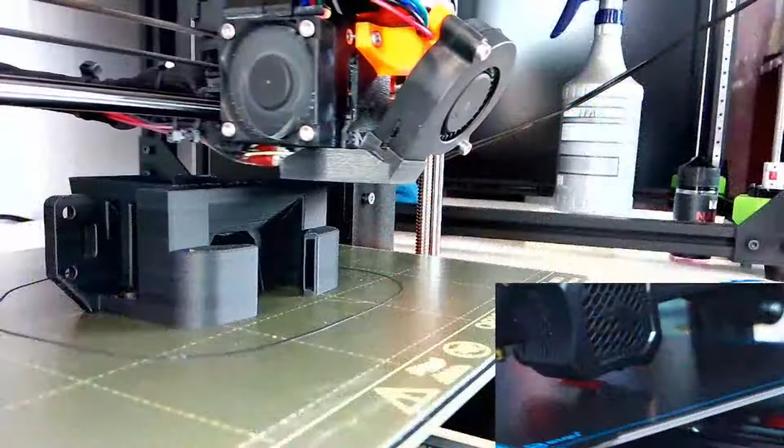I've been playing with the cameras a bit today. On Twitch you've been watching a couple things: this print, the new shroud for the Ender 3 V2, and more recently this one printing, the cable cover. I had recently finished the little fan cover right here. A couple strings on there, but hey, not bad at all.

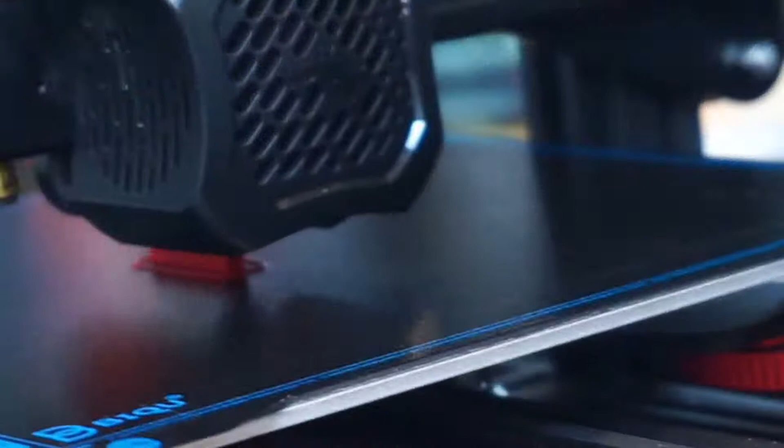Raise the levels just a bit. Okay, I can do that. Boom, let's raise this level there. And we'll go on to this one - that level is raised, and we'll go on to this one, and that level is raised. Let's see if that helps at all, or if I bring this a little bit closer. Oh, but then that's going to be in the way of that camera, so we'll just try something like this.

Okay, there we go. But yeah, so I'm reprinting this basically in ABS over on the Prusa - print this beautiful print coming off of that Ender 3 V2 after we did those modifications the last couple weeks.

So as I turn my head, that's going to affect the audio too. So maybe if I do leave this sort of right in front of me, hopefully not in the way of that printer, yeah, that might be better. Anyways, go ahead, leave your negative comments afterwards about how I screwed up the audio, I don't mind.

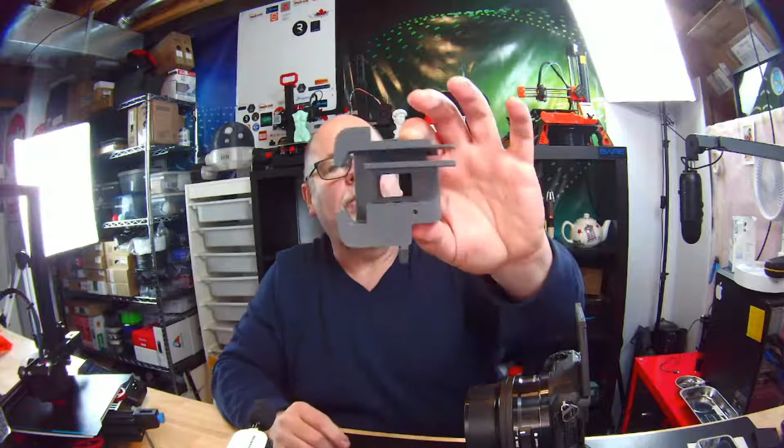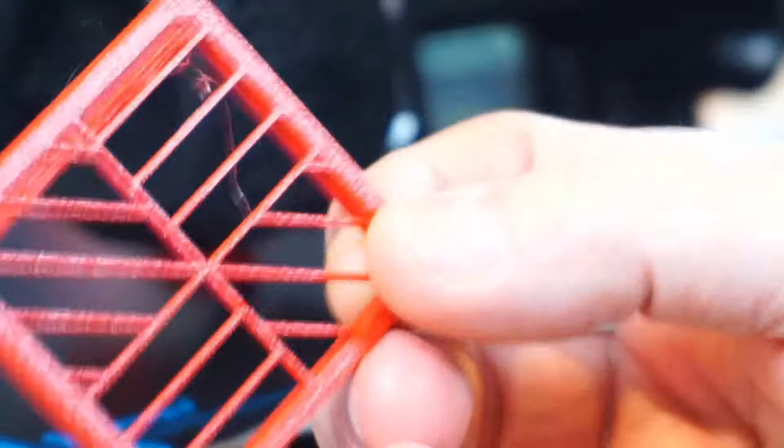Anyways, good print, it's coming out, it's just about finished over on the Prusa, that same thing, so there it is there. It looks like we've got about another, I'm going to guess based on what I'm looking at in my hand, probably about another half hour, if that, to go on this print. And in the meantime, I've also been printing this little cover, sort of just to get a red and gray, red and black color scheme to match the printer. So that's the little front for the fan.

Let me go ahead and pull out this little bit of a tweaker that's on there. I'm printing the little cable cover in the same matching color on this, so that cable cover is going to be done any moment now. That's not going to take long at all, looks like it's got about another 12 minutes left. Then we're going to tear apart the hot end on this and get it ready for that new whole assembly to go on. So that's kind of what we're working on.

Tweaker. I'm a tweaker, yeah. Is that what you're going to call me, a tweaker?

But I want to thank, is he on my stream now, for pointing me out to this model. I'm sorry, I don't remember who it was. K2 Design Lab, there we go, K2 Design Lab.

This is his design, actually, and he was on my Twitch earlier, and he's on Twitch right now. He gave me the link to this, and he said this is an insert for the fan for the front of this guy. Hang on a minute. There we go. I'm going to assume this just sits in, kind of like, it's probably better when there's a fan in here, but that'll sit on the front just like that, which will look pretty cool.

And then the cable holder, which is going to go in here, the cable cover is going to be that matching red. That's Jessie PLA Blood Red. So set that aside, we're going to wait for that print to print.

Having a quick peek over here, we are printing the last bit. I don't know why that's not focusing so well there. Oh, there we go, we're printing the last little bit. Why isn't that focusing? That'll focus on my hand. Oh, it's a slow focus. Let's see if it'll focus back on that. There, oh not quite, oh it's focusing right here. Okay, anyways, that piece is almost done.

Once that piece is done, we'll let this cool off a bit. Or we won't, we'll just play.

Hey Paul, how are you? You'll watch an adult only stream, but not a fans only stream. Sorry. Okay Jason, you're all my fans. What just happened?

I'm doing good, Paul. Thank you. These guys are trying to make me blush on stream, but it's not going to happen.

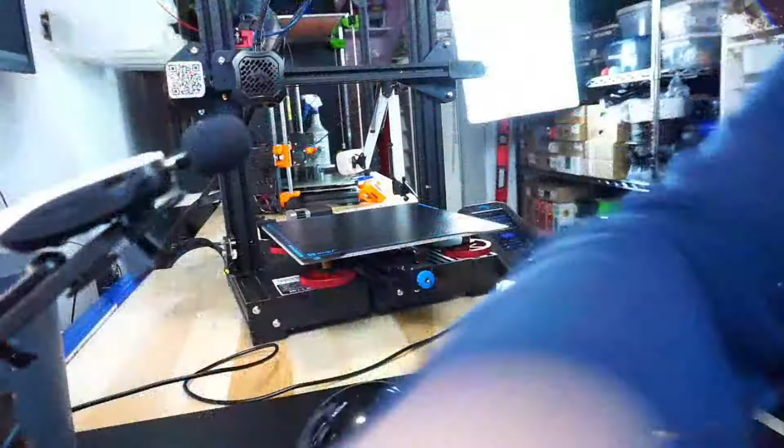Oh, that microphone's right in the way. Let's get that microphone maybe a little more over there. I don't know, that's still in the way. Dang, I wish I could wear that microphone, I meant to, but it just doesn't seem to want to work. Or maybe it's the kind of shirt I have on. Anyways, we'll figure something out here, don't worry about it. Look at that, how's that there? It's kind of out of the way.

I love live streaming. Okay, then we'll pull this guy sort of to the middle, bring that down a little bit. There we go. You here for me? Good. Okay, missing some chat here, I know. Okay, us Canadians have to stick together right there. There we go.

Okay, so Twitch 3D's mic doesn't work when he's wearing a shirt. Bear, stop it.

I wonder if I turn two mics on, does that give me stereo sound or does that just sound really weird? I don't even know if this microphone is working or not.

Anyways, I'm going to slowly start disassembling this head. Let's move that camera up a little bit here, see if we can zoom in. There we go. Looky that, and then you can see the Prusa printing in the background.

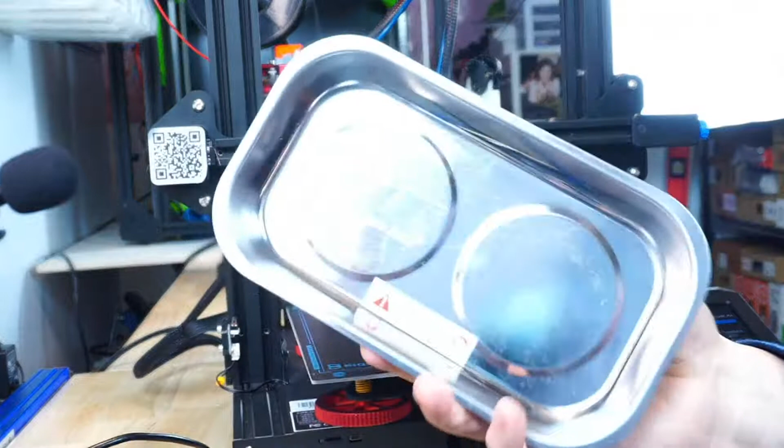And we're going to use our handy dandy... look at the size, look at the size of this. Oh hang on, this deserves another look. Look at the size of this tool, this little magnetic screw holder. I mean, that is massive. That is big, that is impressive, that is showing off. It's not how big it is, it's how you use it.

Okay, there we go, let's go back to the fun cam. Was this the same one? Yes it was. And the second one, I can never find the second screw in this. Is it this one? It's not that one. It is down below I think. I always have a hard time finding, or was it just the one? No, where's the second one? No, maybe it's just the one.

Hang on. What's this one do? No. I always have a hard time getting this cover off. There we go. Well, there is two of them, but I only had... oh, it's only being held on by one.

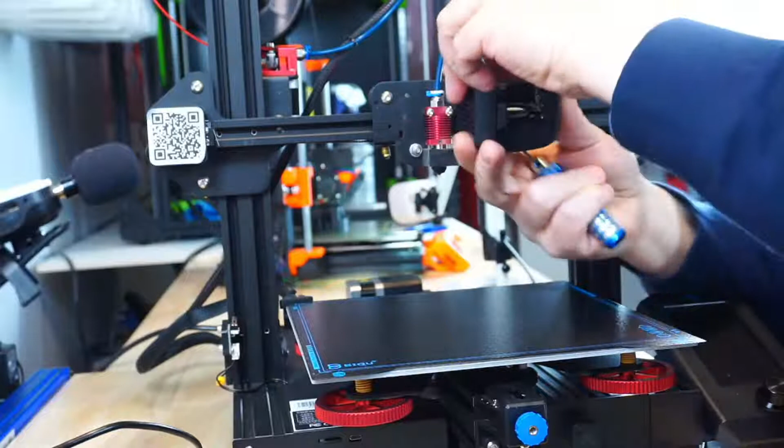Well, let's take the other fan out first. So what I'm going to do is take the inside fan out, and I think that'll clear the way for this part cooling fan to come out. So there's a screw at the top of the blower fan. It's a bracket.

Yeah, I got the screw at the top of the blower. Oh, this, oh right here, this little tiny thing. Ah okay. Oh, and sure, it's a Phillips screw. Yeah, go ahead, don't make it a hex key, make it a Phillips. So now I got to pull out my little tools.

Why is this not focusing? Come on. What are we focused on? We're focused on behind what's going on behind it. Focus here, focus here, come on. Don't worry about what's going on, nothing going on behind there. Stay focused right there. No. Bad camera. Focus, oh come on.

I got criticized in one of my videos for my camera work one time, said it should have all been set up and everything. There we go. Okay, they said it should have already been set up, you shouldn't have had to mess around with your camera like that. Well, oh well, sorry. Yeah, the movement behind is doing that. I could put that camera in manual focus, but not gonna.

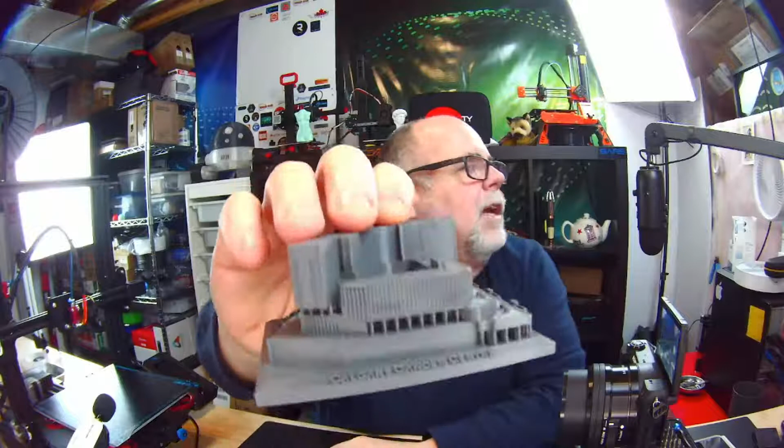In all honesty, people ask me now, I've had people come to me locally and say, what should I get for my first 3D printer? And they're on a budget. So I tell them an Ender 3 V2, because this thing is just performing beautifully for me. It's putting out, I don't know how many of you saw this, but after I did all the tweaks last week, I went ahead and printed a tiny little model of that big one I did. This on the Ender 3 V2, and it came out absolutely gorgeous with all the little details. That is incredible, that I got that much detail and that nice of a print off this Ender 3 V2.

So that proves this can do tiny little details. Now you'll see right in one corner there, towards my pinky around the corner, there's one of the supports I couldn't get out. It was just too small and I would actually wreck it trying. But everything from the bottom layer on this flexible build plate to the text, to the little windows and the pillars - boy, it turned out great. All my Ender 3 V2s are giving me that kind of quality with just those minor upgrades.

So, the software update - this is the Jyers firmware update. I used to call it Jersey, but it's the Jyers firmware update on this printer, and I'm doing that. I've done it on 2 of them, and I'm going to do it on a 3rd one. It is incredible, it's a great firmware update if you own an Ender 3 V2. I don't believe it's available for any of the other Enders yet, I don't know if he's going to do it, but it allows you so much on-screen control without having to hook it up to Pronterface or any of those things. It's incredible, it is really incredible.

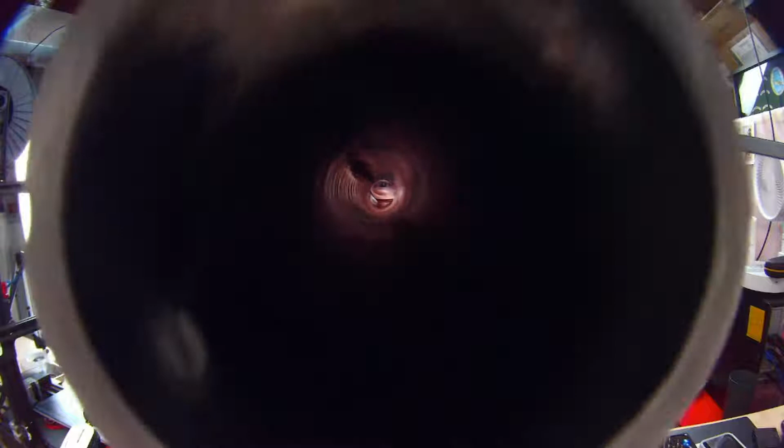Yeah, this is where dual fan compensates, you just need more actual CFM than the printer is generating. Makes sense, but this tubing may work better. I think you can get this in 4-inch too. Yeah, larger than your fan's diameter if you can, probably do a step down. You can get a 4-inch with an adapter to a 6-inch. I'm pretty sure PVC tubing, I believe it does come 2, 4, and 6-inch.

We are on the top layer. Let me adjust this camera a little bit.

Woohoo, come on, get in there. Get in there, get in there.

The print head's kind of hiding everything, but we're on the top layers now. This is going to be done in a minute. That's printing nice for ABS, my goodness. First time I've tried this brand of ABS, so quite cool.

Add as few bends as possible. Yeah, none if you can. There'd have to be one, I guess. Probably 2 bends at the most. That could be designed in a way. Anyways, we're going to figure that out. Get a step down print. Yeah, I could print any adapters I need, for sure.

Let's see what Liam's posting here. You're planning one of these. Let's have a look and see. Oh wow, that's huge. 8-inch inline duct fan, variable speed control, 135 US. That looks like quite the beast as well. The guy from the channel Unemployed Red and Hillbilly Creations has done a good video using this type of fan for his laser cutter.

Okay cool, I'll look into a few things. Yeah, again, first thing I'm going to do is make the enclosure for my laser. And the enclosure does not need to be too tall. I'm going to design and make my enclosure, and probably 3D print my corner joints for the enclosure, et cetera. That's a little project down the road.

Okay, we have a finished print. Oh, where'd it go? Oh, right there, we have a finished print. I'm going to let that cool just a bit because that was printing really hot - a hot bed, 110-degree bed and a 260-degree hot end. I won't touch the hot end to see if it's cooled off, but we'll let that bed cool off a bit. Let's pull it off the printer and let this thing cool off. Yeah, that bed is a little bit warm.

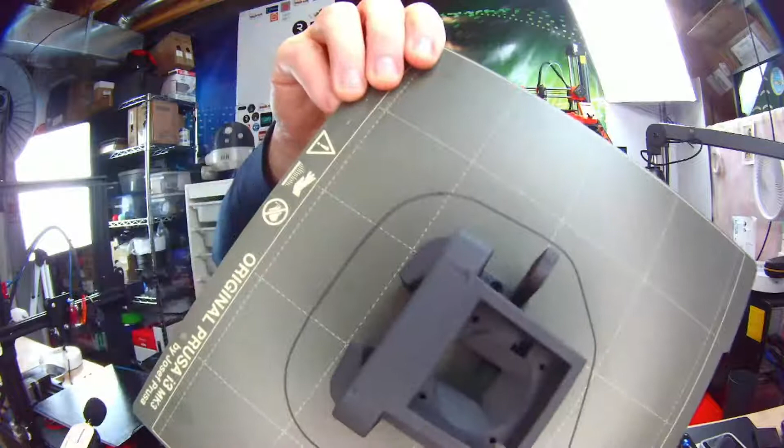That's a clean print. Oh, it's got like a nice black matte finish too. Yeah, that is Matter 3D's Performance ABS, first time printing with it. So yeah, that looks decent. I like the matte finish, it's pretty cool.

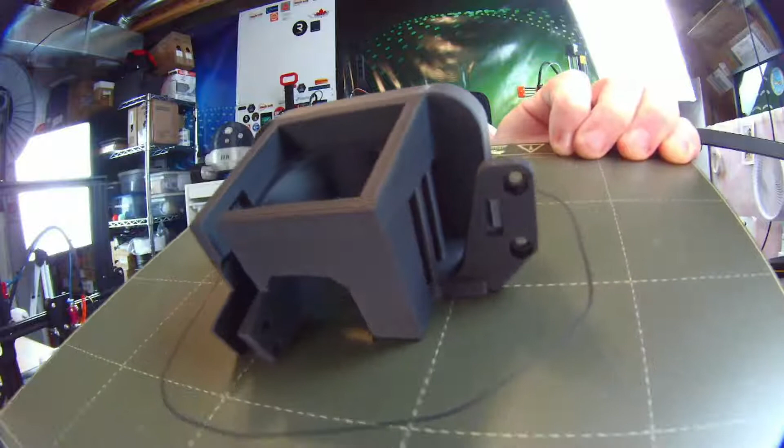Ooh, how close can I go? How close can I get? Yeah, let's let this cool off a hair. And there's a BL Touch mount. I don't have a BL Touch yet, but I can put it. I don't see ever needing a BL Touch on an Ender 3 V2 because I pretty much... I think I can get this off now.

There we go, okay, let's put that back. Yeah, I don't think I'll ever use the BL Touch mount. Oh, that's light, oh my goodness. And that's strong. Yeah, it's light and strong, that's good, turned out nice. There's the bottom.

Pretty strong. You have the same on your Ender 3 Pro. Same, this thing here? Cool. Amish Gnome 3D, welcome, thanks for popping in. Looks acceptable. Thanks, Jason.

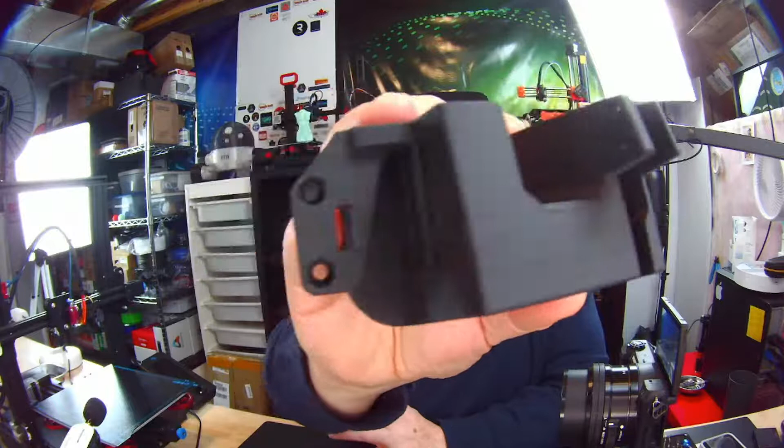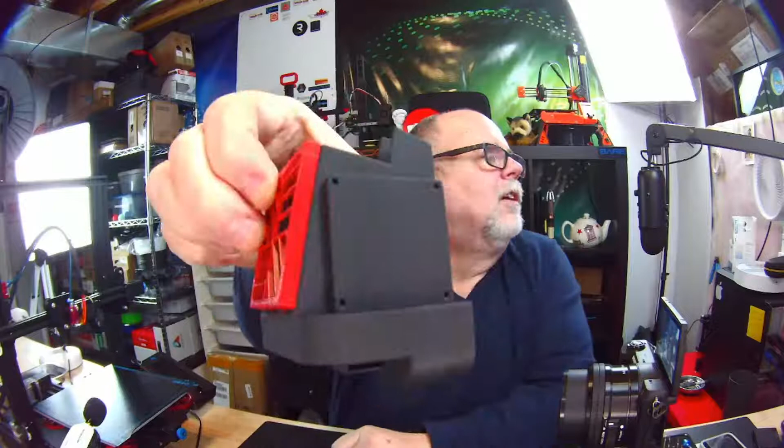Yeah, this is a nice matte finish, I really like that. Again, the camera doesn't do these things justice, but that is a nice finish. And that's going to look great with the Jessie PLA Blood Red. Oh, look at the way those colors are going to look together. And then the cable cover on the top is in that same red.

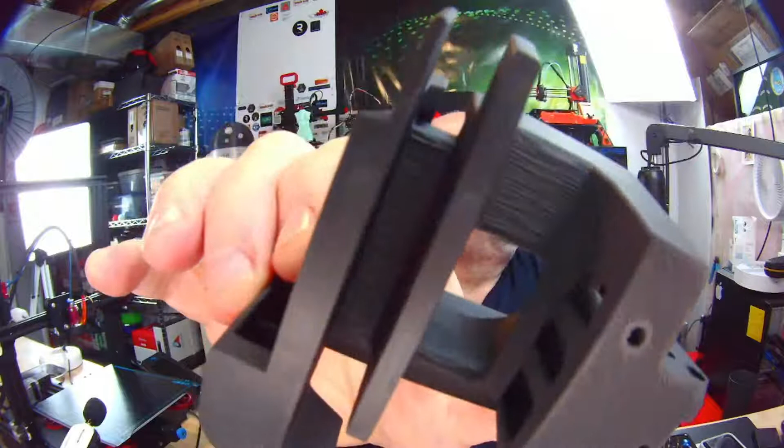That's cool. So, tried to break the fresh print. Okay, old curmudgeon, I'm just showing how strong this thing is. I've done it before and I've heard crack, and it happens. So the nozzle slows down and then gets rather shiny. No, that's great, I would recommend this filament for anybody, and even the bridging in there turned out really good, considering there was no cooling fan at all on this whole print. There we go, you can see the bridging underneath - turned out really good, so it is a beautiful print.

Okay, speaking of a beautiful print, woohoo! Let's switch to this camera now.

Problem with this camera is not many people know about it. This is a Sony A5100. Right now I'm on a 15th of a second, and right there I'm on a 13th of a second. I don't know if it affects the frame rate at all, but in order to get enough light to see this, unless I shine a light right on it, my aperture is wide open too.

Heat is the difference between shiny and matte, so to lower the temperature, slowing down and maintaining the matte finish is feasible. This was run at 260. The recommendation for this filament was 240 to 280 or so, it had quite the wide range of recommended temperatures.

So we're going to fit this fan into here, and then the little part cooling fan onto the side. Let's untangle these wires here a little bit first. There we go, that makes more sense. So this guy is going to sit in here, and then this little part cooling fan is going to come on and pop onto the side just like that. Cool, okay, let's first screw this in.

I'm going to have to use some M3 screws. The other one was just self-tapped, this old cover here had the self-tapped holes in it. Anyways, you had to screw in from the back. Whereas this one here, I'm going to have to put some M3s in from the front and then just put some nuts on the back. Let's see how well this is going to fit on here, and so far that looks pretty decent.

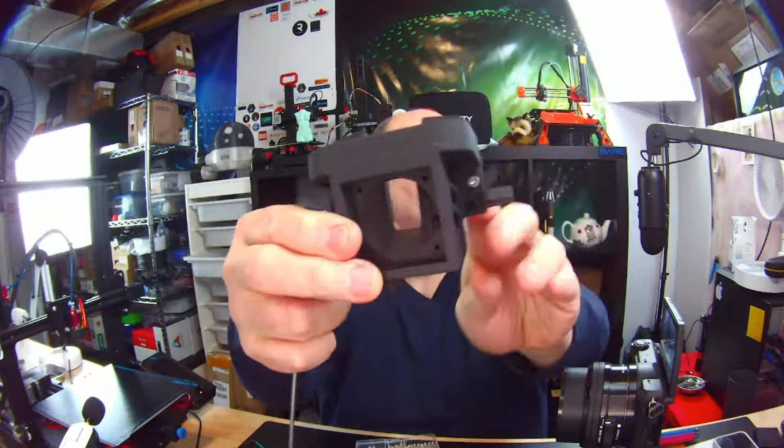So this piece, what they've done is the bolt or screw or whatever has got to go right down through. You can see where it is in there. So they've given you a little access hole up through here to put your tool in to tighten that in. There we go.

That looks about right. Here, I'm gonna pull this guy around here so you guys can kind of see what's going on here as well. Let's see if this works better. Oh, there we go.

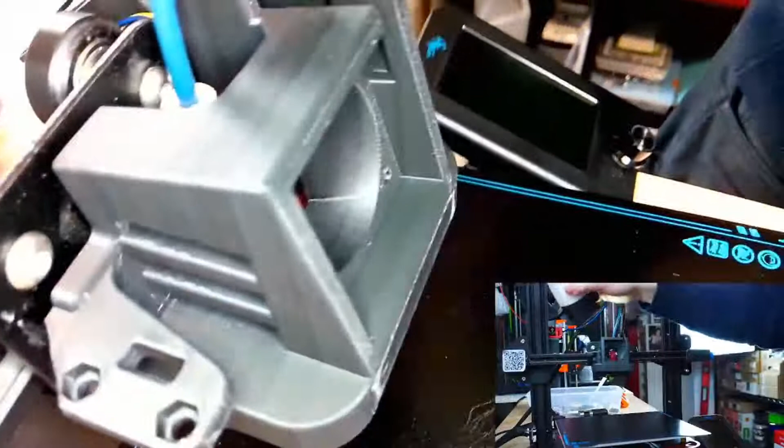So this one screw down below here is threading in fine. That second hole, however, if I tighten that on, it seems to be in the right position. Maybe that's all I need, because there's a second hole in the back here where I fed that other screw in through the front here. That's not lining up with any hole on here.

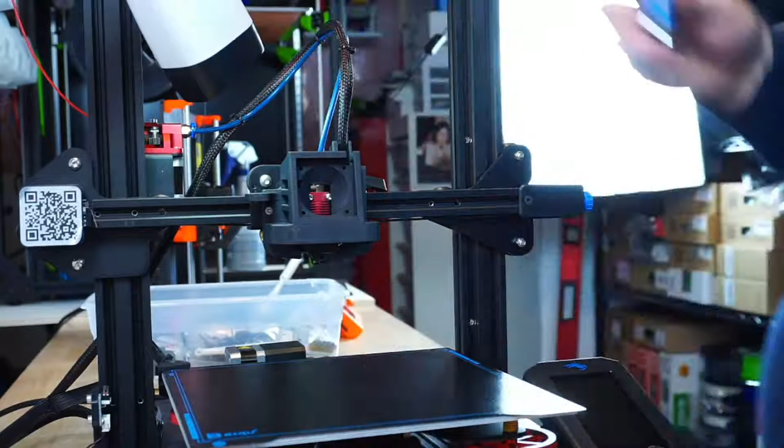So either it's an older setup, no, see that's no good, because that cannot move like that. So there's something, I need a second one to line this up, but this is not lining up at all.

Never tighten the first till they're all started. I know, but it doesn't, it's way out of lined up.

You may have printed the one for the Ender 3. Well, I printed... let's see. Don't tell me I printed the wrong friggin' one. The one I printed was downloads.

Was the Satsana BL Touch, which has on a V2. So for the Ender 3 V2 was the one I printed.

Let me go in here. Bear with me. I am going to put this camera on here so you guys can at least see me looking at my screen.

So let me go delete this model here. I don't need that. Let me look. I hope I didn't grab the wrong one. I downloaded both, I believe, but I know there was a difference between the two, because one says 2 and one says V2. And so I assumed the V2 was the Ender 3 V2.

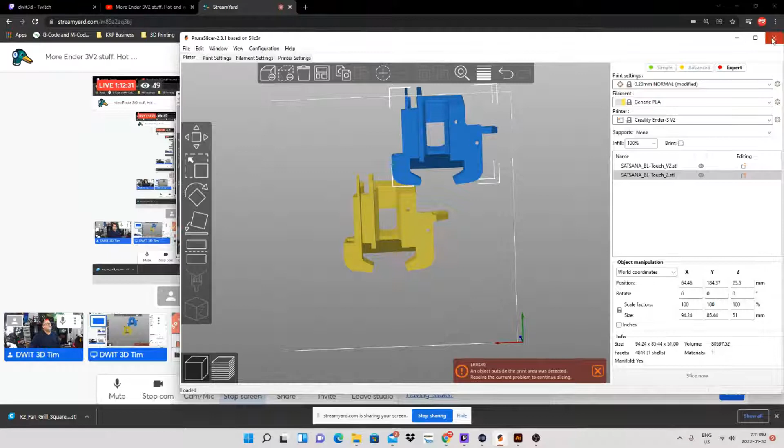So these two would not be, yeah. Well, let me make sure, in fact, that I did.

Let's go to Thingiverse, and let's quickly pop over to Satsana. What's it called? The Satsana. Hang on a minute, sir. I just forget the name of it. It's called the Satsana. Okay, let's open this back up again. Satsana. Whoops. Satsana.

Ender 3v2. So it is remix for Ender 3v2 right here. Was that the one? No, that's a different one. Ender 3v2 4010. This is the one here I downloaded, I'm sure.

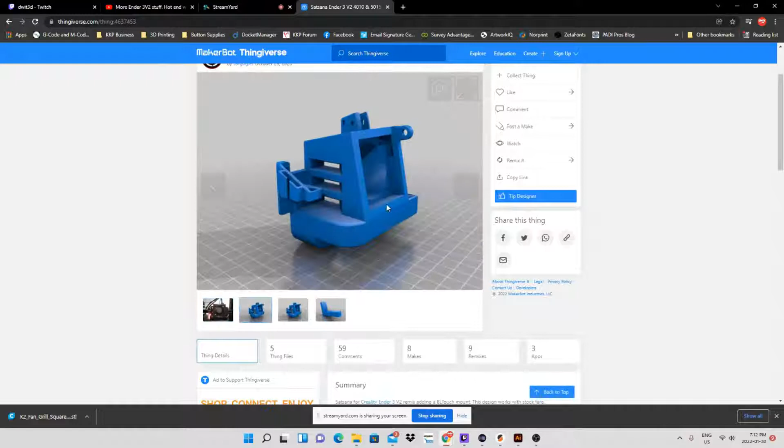Okay, I'm sure everybody can see my screen. And let's do this here. Yeah, that's the one right there I got. So the holes, or is it? See, that looks different. Why?

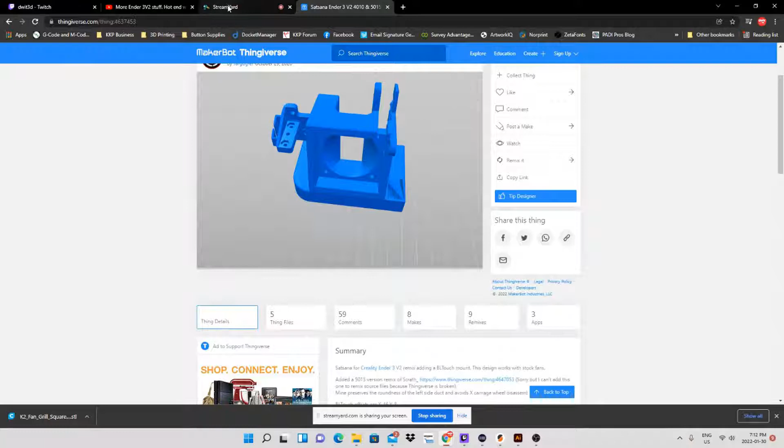That looks different. Did I download the wrong one? Come on, did I download the wrong thing? Yay. Yeah, I might have downloaded the wrong thing. Let's see, that's a different one. No, that's different than what I've got. Mine definitely doesn't have that little notch right here.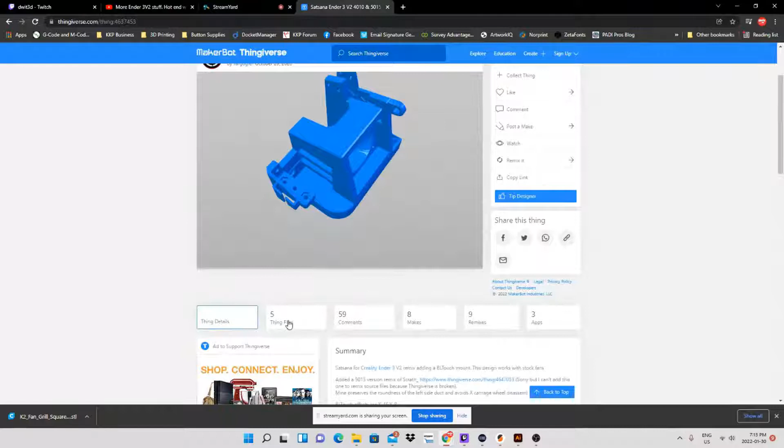Whoa, okay. I wonder if, in my haste, I did this one. Oh, you know, I bet I did. Son of a gun. Did I make a mistake? Did I download? Oh, you know what? I think I downloaded the wrong one. I think I downloaded the Ender 3.

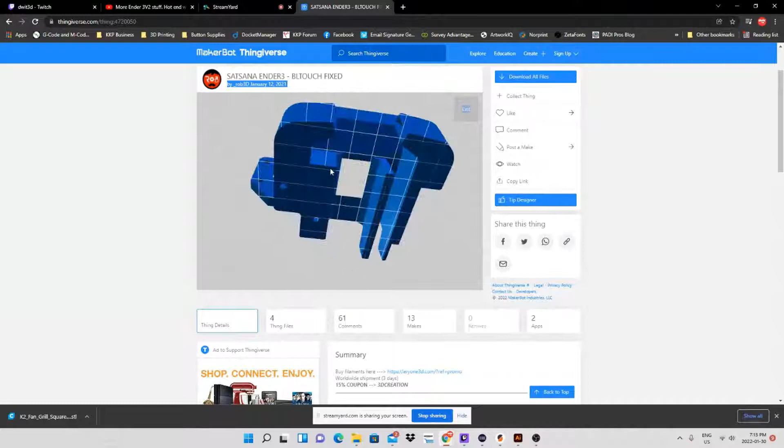This looks like the one that I just printed. Oh, no. Oh, well, you know what? So if you look at this one and the way it's laid out versus the, okay, keep an eye on this one. See how that's kind of laid out. You know, how it is.

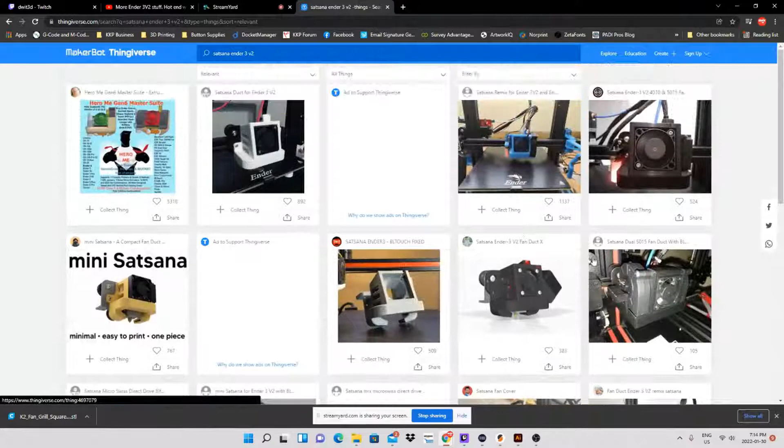Yeah, and then versus, oh, man, Ender 3v2 4010. That's the one I want right there. That's going to use the original cooling fan on it. So right here, if you look at that first one versus this one, and the way that mounts with the hole up there and down here, I think, as embarrassing as this is, I think I downloaded the wrong model.

Oy. You know, that's why I love live streaming, because there we go. Let me get this out of here.

Yeah, I think anybody have an Ender 3 want one of these? Oh, man, that's why you love my streams, Dan. Make it work. Drill some holes.

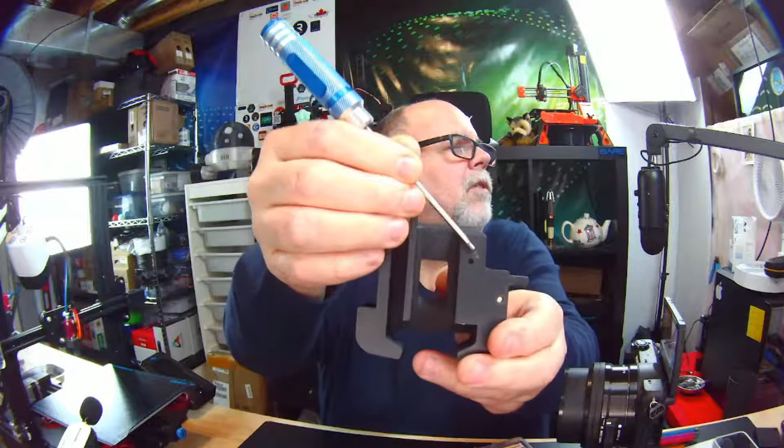So you can see right here the hole, and then right above the hole, right there is where I marked it to go. Problem with drilling through that is that's going to want to drill right into there, right through this whole thing where I tighten the fan on. Although I could get away with tightening the fan with three bolts, I suppose.

Different mark, oh there's marks, there's a couple marks. Marks are good, any mark that's on my stream is great. Mark Flanagan, I've known for 150 years. Mark Gilbert, I've known you since today, or whenever you started watching my streams. Hello, both Marks, though, you're both just as wonderful to me for being on my stream.

Thank you. 3 screws holding the fan is fine. Yes, but can I drill through this without... well, let's, only one way to find out, isn't there? Grab a drill with magnets on it.

Grab a drill bit. You guys want to see my really cool drill bit holder? Look at that, I 3D printed this myself.

Where's my smallest drill bit? Yeah, this is my smallest drill bit. Okay, well let's see. You know what, either way, if I have to print the part over again, I have to print the part over again. But it's a 5-hour print, and I'm not going to stream for 5 hours.

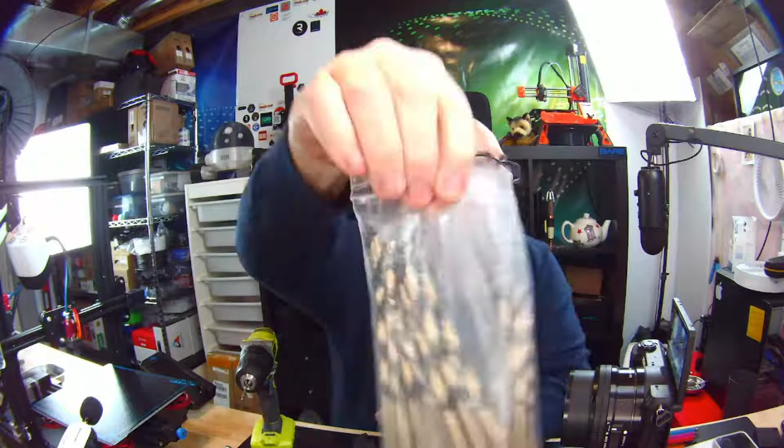Those of you that know me, where's Kieran tonight? Or tomorrow? It's tomorrow for Kieran. Kieran, where are you? Those of you that know me, drill, sharp bit, hands, parts, blood, maybe. Let's just see if I can get this to go straight. Oh, it's drilled through my little thing here a bit. Well, let's see, I made a hole.

Okay, now I'm going to have to make that bigger, because for a 3mm screw, for an M3, I need a 3.5 mil hole. What do we have here? We have a 3.5 drill. I started it with a 3, we'll go up to 3.5. Be careful, I am Tron. You know, Kieran's not here.

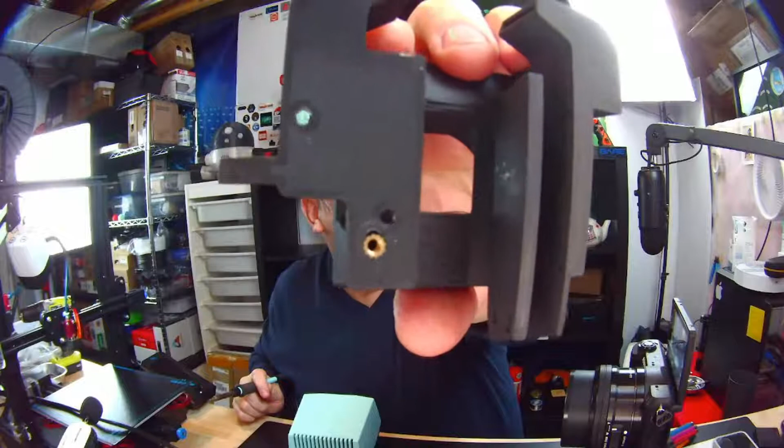Probably around printing temperature. Okay, let's just see. Let's give this a go. We're melting, we're melting, we're stopping. Oh look, it worked, I got an insert in. Did it stay in? I don't know, but it's in. I can turn this off and unplug it.

Oh, you know who I saw do that? It just hit me, it was at one of the local meetings here. Let me put the soldering iron away. It was at a local meeting. The person had made, I have it over on the floor there, I don't know if you guys have seen it, it's like a drill press for your Dremel. It's a tiny drill press, you put your Dremel in it and you can do a drill press with it. Well, this guy made one with these type of insert plugs because he did a lot of insert things, and he puts the insert on there. He puts his part down and it just drill presses his insert into it. Really, really cool.

Hot glue or super glue? We don't need no stinking super glue. Don't tighten it too much. Okay, well, let me see for one, I want to make sure. Oh, it's in there, it's in there good.

Okay, well, so I don't need a long bolt, I can probably get away with a short one. Let's see what I got for M3s here. I got everything under the... this is my spare parts bin for the rat rig build, by the way. Most of the stuff in here, there's an M3 10mm I can use right there. Most of the stuff in this box is left over from the rat rig build. So that's cool.

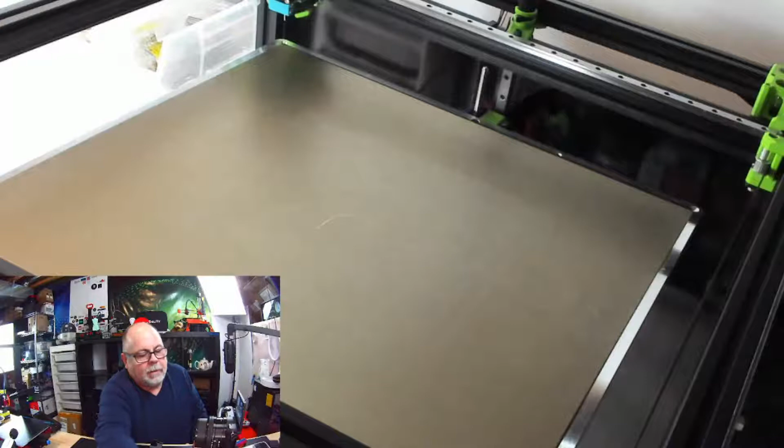Okay, let's try this again. Let's grab the screw out. Acetone welded in, acetone welded in. I don't have any acetone.

What do you think, I just have a bottle of acetone sitting around on my shelf here, Jason?

A dab of CA, I think this will work. I'm just going to try it. Ah heck, let's just do it.

That's what you think, DWIT. So people ask me, what's it mean? It means do what it takes. Okay, DWIT, or it just means do it. Do it, just do it. Anyways, whatever, I'm going to shut up now.

Okay, let's put this in. Okay, let's get this one started. Let's see how we're going to do here. Let's go to the camera here so you guys can see me messing around here.

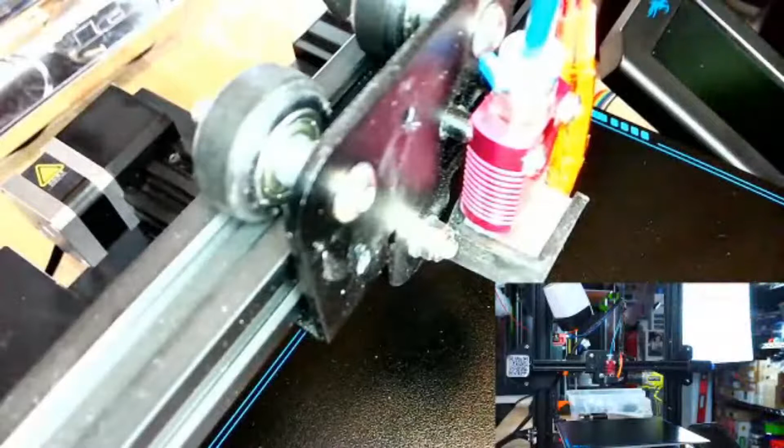Or let's go to the close-up here, let's use this close-up camera. Again, this close-up camera, the trend for this close-up camera was started by Mr. Chris Nerys himself, because I saw him using this close-up camera and I loved it, so I ordered one right away. Now a lot of streamers are using this exact camera.

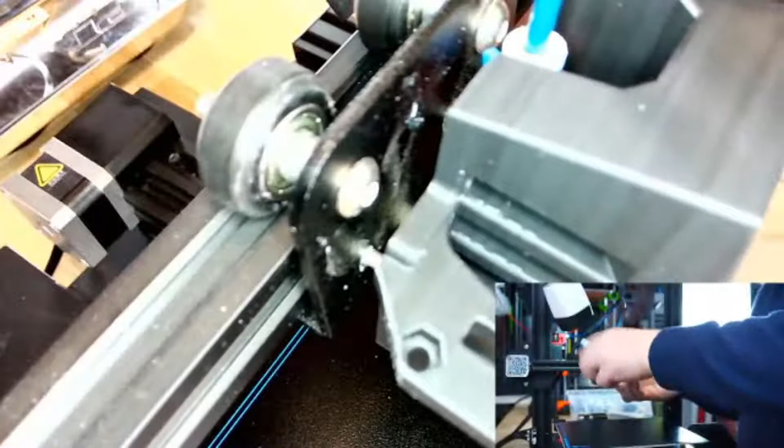Okay, let's get this one started. Okay, so far so good. So I can tighten that, not quite tight, just enough so I can wiggle it a bit. And then if my drilling, drawing, etc. was accurate, I should be able to.

I'm going to not make you guys dizzy, we're going to move this guy around. Hopefully show you in here. Let's see, there we go. So where I'm looking is this hole right here. Doesn't look like it lined up. Oh, maybe. Oh come on. No.

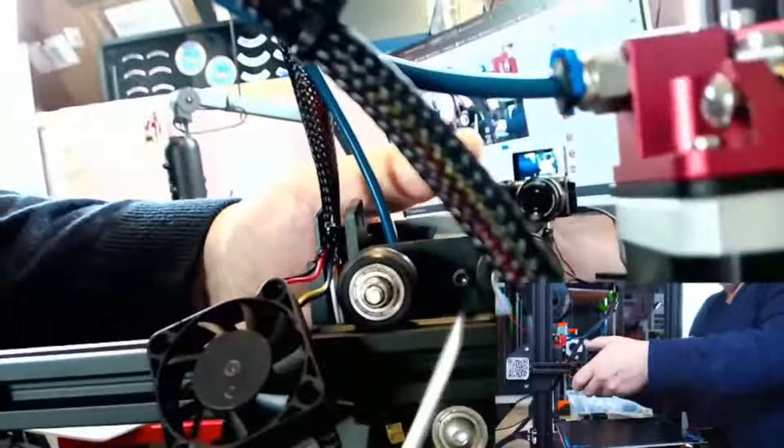So let's see, can I bite that? Is it going to bite? I'm shaking the camera more than anything. Hang on, let me back this up, the wire out of the way. Come on. Ah heck, forget that. You guys can watch me from the front as I struggle.

So if I put this in, if I get this one started at least. Come on. I don't know why I'm doing this, why don't I just print a new one? For goodness sake, I think I got that. Oh man. Okay, so what we're going to do is take this one out a little more, so we have a little more wiggle room. I'll tell you if this works, if I get this in the hole.

Nah, I didn't line it up. I didn't line it up good enough, guys. The rat rig probably could have printed a new housing.

I know, you shall bend to my will. I wish it would bend to my will, Chris. Let me try another strategy. Let me take this one right out. Let me put this one in first. Bend to my will, I have the power.

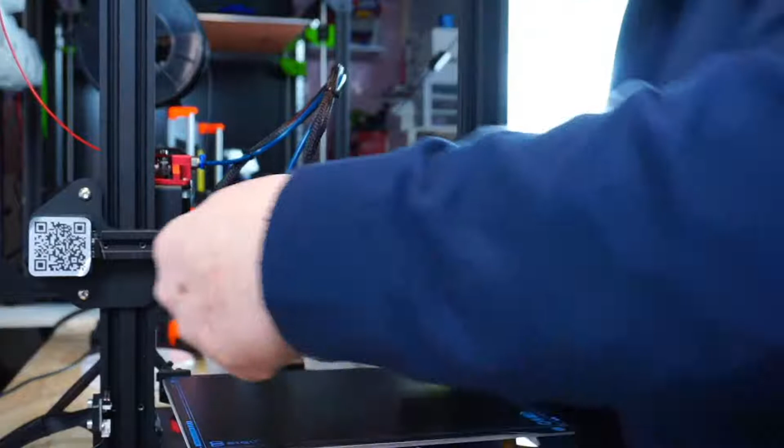Nah, no, I could have had one half printed. I could have had one reprinted on the rat rig by now. You're right, Tron. Okay, unless I'm going to try one thing. I'm going to end up reprinting one anyways, but this is fun. I think you guys enjoy watching me struggle.

Where'd my plug go? I love my new power bar, by the way. It just lets me have random plugs. Down over there I have a power bar with like 14 plugs in it, so I can just have random plugs hanging down as I need them.

We're going to heat this up again, and we're going to move, we're going to forcibly move. Once you get the other hole lined up again, remove the iron. Put the iron in the hole of the screw as it heats up. Ooh, okay, good idea. Okay, this could get interesting. I'm going to end up burning my mouth, you watch.

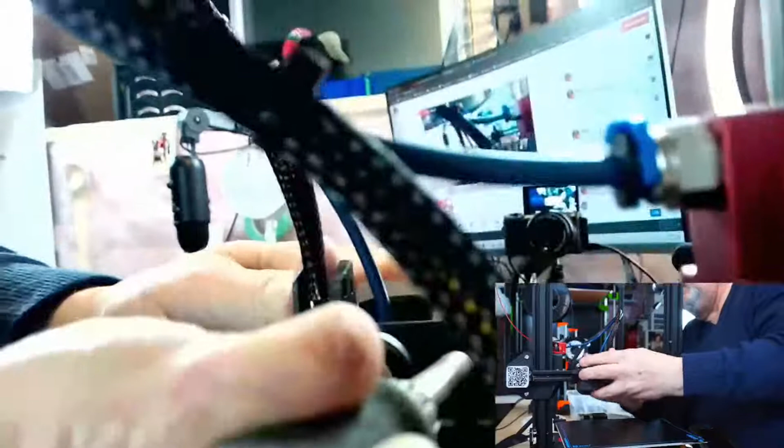But what if - I think I know what you're saying, but also, here, let's do like a surgeon does. Let's come underneath. I think what I can do is I can go like this. I can pull that down a bit. Now did that work? I think that might have worked. Let's just see. Let's put this down, let's get this in here.

Come on. No, not quite. Yeah, I'm not trying to push the insert in.

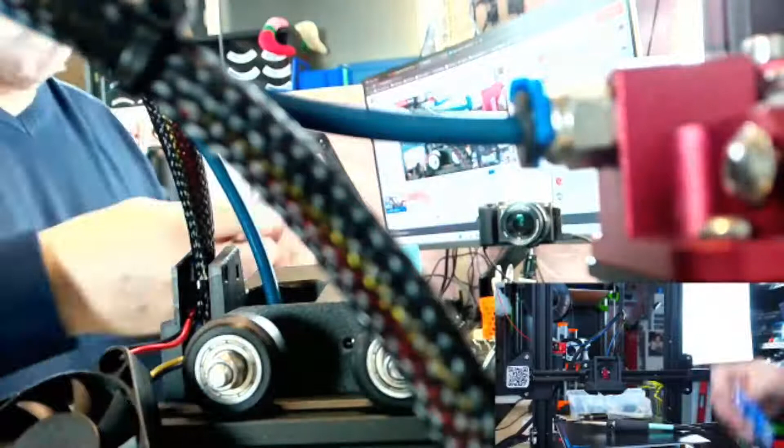Okay, I think I see what you're saying though. This is not how this stream was intended to go, guys. Number one, I was supposed to print the correct part.

Oh yeah, that didn't even hit it. Let me just try something real quick here. Yeah, that's not even budging it down at all. I'm trying to melt it down, I'm trying to force it down.

That might have worked. That might have worked. It might work, fun to watch. Yeah, fun to watch somebody else struggle, isn't it?

Let's see, and it didn't loosen it. Wow, it lowered it, and I don't think it loosened it. It's still in there good and tight. I think it lowered it enough, you can kind of see how much I lowered it. So...

It'll be too low now and I'll cry. But hey, what the heck, you can see a grown man cry.

Don't burn your hand on the soldering iron, Tim. Don't burn your hand on the soldering iron. The channel was built on mistakes and burns and blood, so I'm proud to say that. I don't care what anybody thinks.

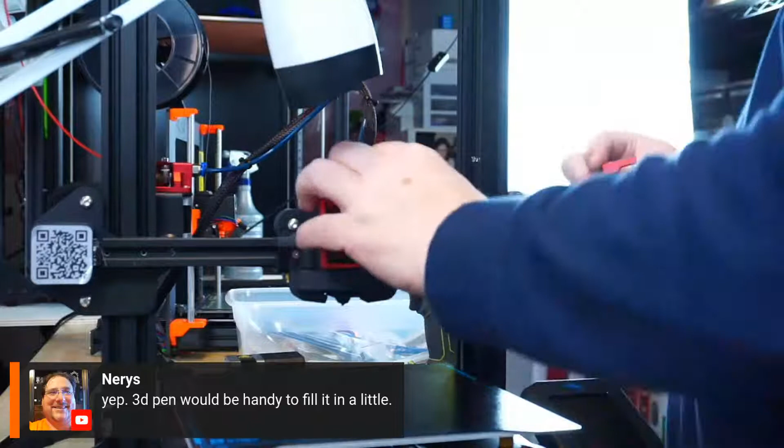One thing I don't like about this camera, if you accidentally tap the focus button, the autofocus shuts off and it won't come on again until you turn the camera off and on, and then you got to reboot OBS and yada yada yada. So can I get close up on this?

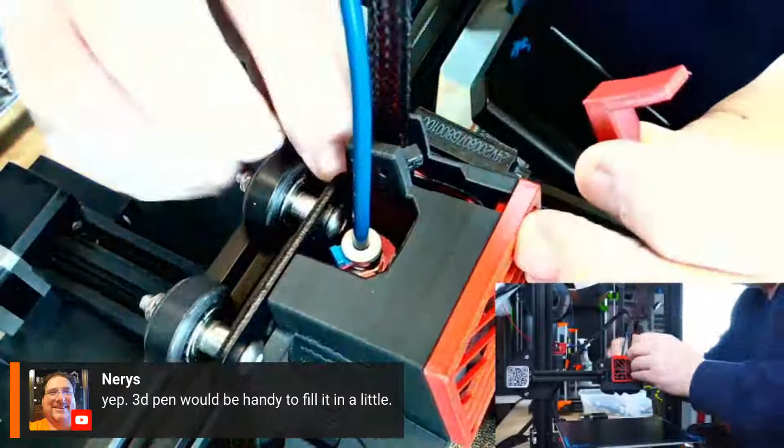Yeah, I can, so there's that. So then we have this. I'm going to try and get this fan wire in there. Yeah, it's pretty close, it's good enough. I don't want that to rub on the outside there.

I just need to push, give it a little bit of a push in. There we go. Just so it's not rubbing on the gantry as it rolls. It is. I'm going to have to zip tie that back after, but that's okay for now. And so that loom is going to hang out, and then this guy just sort of fits in, just kind of like that.

That looks pretty sharp, if I do say so myself. These little guys here, the little fan wires, are rubbing on the extrusion a little bit.

So actually I'm just going to quickly grab a zip tie, just as a temporary measure, and I'll fix this up later. I know people are going to say that looks so terrible, why don't you just do it properly now? Because my stream ends soon, and I want this at least to have this together and start a print.

So I'm just going to zip tie this up, just like that. That's it, and you hardly even notice I did that. And that keeps that fan wire from rubbing on the extrusion while it's printing. Matter of fact, I like that. I can just leave that just like that. Look at that, that looks good.

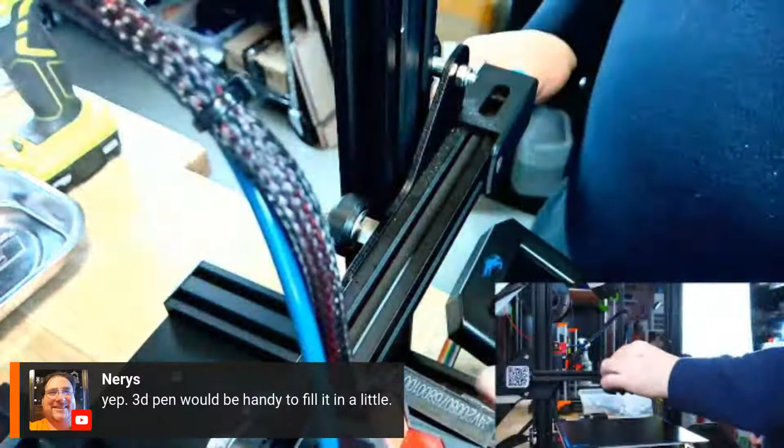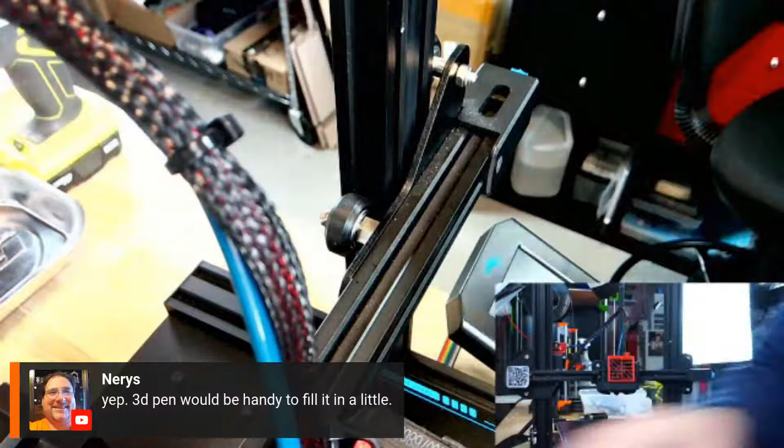Nothing wrong with that. Now I shouldn't have to adjust E-steps or anything like that. Nozzle hasn't moved, so my bed - because I'm using these really heavy-duty yellow springs that we did - here, I can zoom out a bit. Because they're very tightly compressed, and we use these wheels, my bed level has not budged.

So let's rip a print. What the heck, I'm going to do a quick print. If I run over a little bit, that's okay. So I'm going to go through.

Why is that still highlighted, and how far back was that? Man, I'm kind of bumping keys and everything. Let her rip. So we're going to share my screen here a bit. Or we're not going to share my screen a bit. Close, come on, I'm going to get this. Let me organize myself here a little. Share screen - this screen, I'm going to share myself.

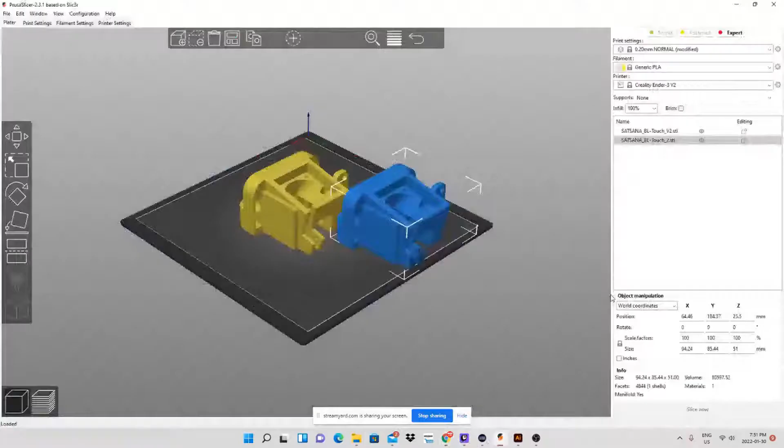Look at this, scary. Ready, set, boom. Let's bring up PrusaSlicer. Actually, let's minimize that, let's close this. What was I going to print? Oh, I don't know where it went.

Let's print, okay I'm going to start this. Won't be a quick one, but at least I'll start it and it'll finish. But let's open the slicer, let's get rid of these - I don't need these anymore because we kind of made them work. Let's put this model in here, and let's get this down.

Was it 50% I did? No, I think it was more like 25. 30 - let's do a 30% of this model. Okay, we'll do a 30% of this model.

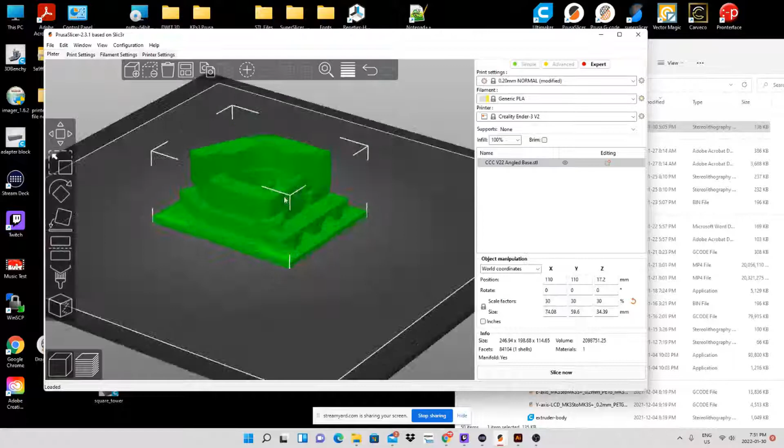We will quickly paint on a few supports where they've got to go. I happen to actually know exactly where I have to place some supports in this thing real quick. So we'll just do it quick, and I know they look rough, but it works out well - believe me, I've done this several times. And we'll come over to this side, we'll paint a few supports on right here. Boom, just because they go up the side, it doesn't matter, they're not going to affect that.

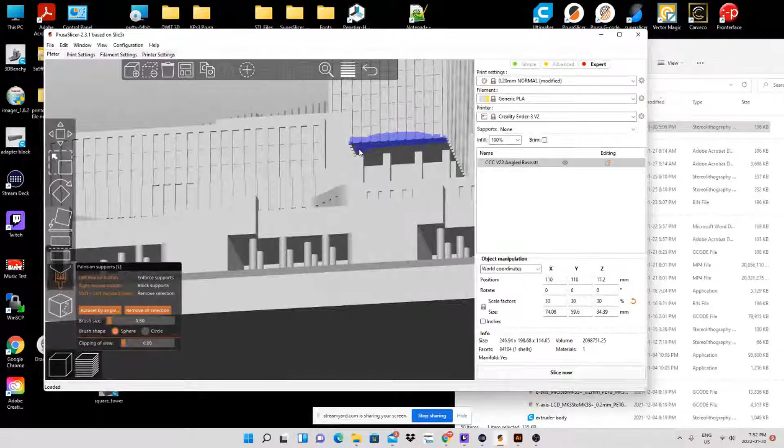And then I know that I have to - where is it? This side here? This side here, where is it? Right here, I need to paint a support right there. I need to paint a support right there. And I need to paint a little support right there. That's it, so that is the only supports that this model needs.

We are going to print it with 3 perimeters, 0.2 millimeter, 4 and 4 is fine. And I believe because of the size, I got away with 10% infill, probably even less, but that's fine. We'll do rectilinear. Skirt and brim, I like to do 2, I like to do it 25 millimeters out for one layer height. Support material, I'll worry about in a second. Filament settings - we're running Jessie PLA Blood Red, 210, 215 for my first layer. 60's fine, 60's fine. Cooling, 100 is fine. Let's slice it up.

And we're looking at a 3 hour and 13 minute print. So I'm going to quickly throw in an SD card.

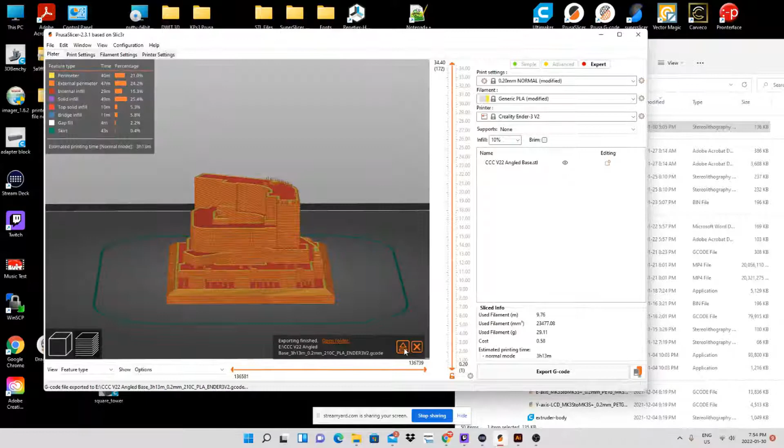Close you. This tells me there's an SD card. It's going to be CCC V22. Save to the SD card. Eject. Close. Close.

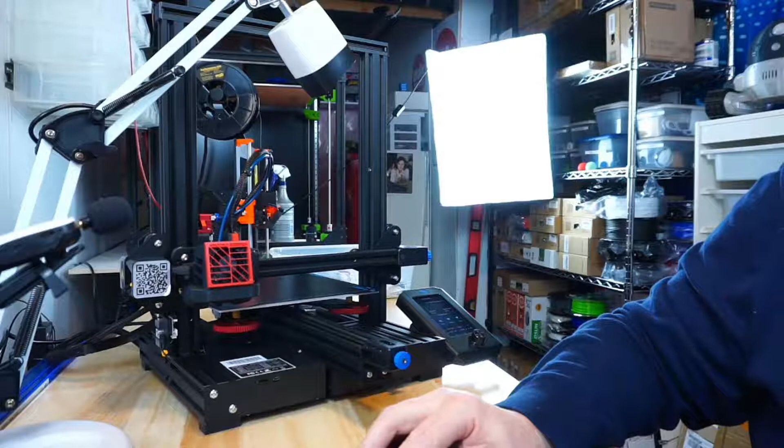Let me take you down, 'cause I'm going to strawberry fields. I know, don't sing, I promise I won't.

I'm going to add this existing ELP. Okay, let's make me a bit smaller here. You guys don't need to see all of me, we'll focus on the printer.

There we go, that's a little better. As I put a few tools away - you see as low as minus 40 in New Mexico, but never seen lower than minus 10 Celsius. Or Fahrenheit. Okay. What about snow? Do you get much snow there, Chris? And does it last?

Okay, put the good tools away.

Now, I happen to know, just because of the way I got my Z offset set up in here, that I've got to go down and adjust my Z offset by 0.06 to get my perfect first layer. I can adjust that a bit, but I happen to know that's exactly what I need to do, so that's why I don't bother fiddling with it.

And again, this software, it's pretty cool actually. Let me zoom in and show you guys. For those of you that don't know about this firmware for the Ender 3 V2, it's the... I just lost it again.

Oh, come on. Rarely sticks around except in the shadows. Yeah, exactly, that's the same here - no snow other than in the shadows, or on the north-facing things.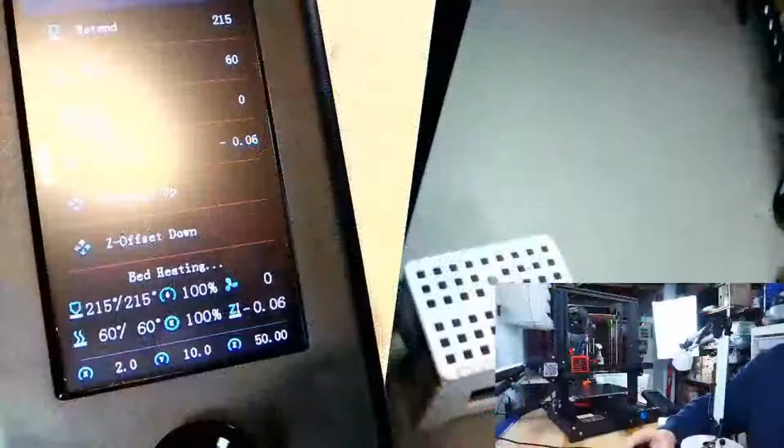So if I go close up, in this particular firmware, I like these adjustments. This is the one that - oh shoot, I've just lost the name of this firmware for the Ender 3 V2 - but it's Jyers. Thank you, Barticus. It's Jyers firmware.

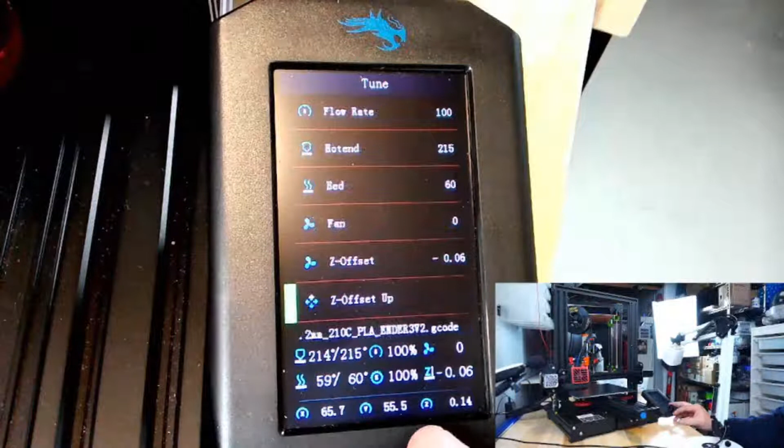So in the tuning menu, it's pretty cool because you have your basic tuning. You can tune your print speed, your flow rate, hot end and bed, of course, and your fan, and there's your Z offset you can tune. But you can also just do Z offset up, Z offset down, and push the button, and it just goes by 0.01 each time you push the button, which is fine.

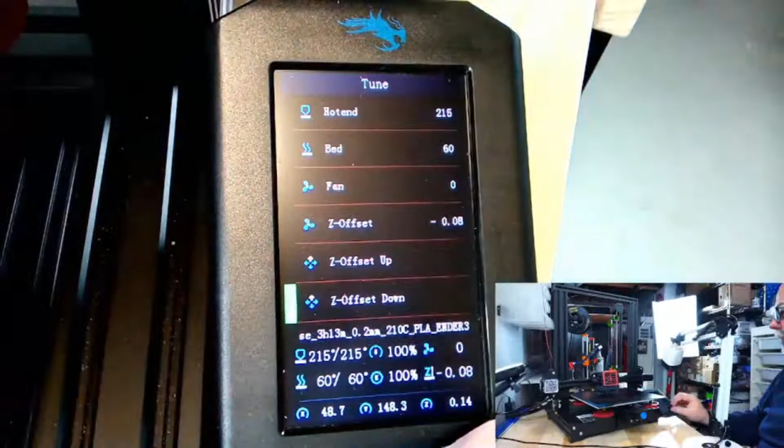You can go here and do your Z offset with the number, if you know the number or whatever, but I like the fact that you can just go 'okay, I want my Z to go down a little bit,' and dink, dink, dink, and it's down. So it's pretty cool, actually - really, really cool that this Jyers firmware is designed for this. Now my Z is way too low, way too high, so we're gonna just put that off again.

Let's switch the camera back to you guys here. There we go, and I can zoom in a bit here for you. Yeah, my Z was too high, so I had to lower it a bit. That feels about right - should have cleaned my bed off a bit better. And we're going to go down just a little bit more, so we're down to minus 0.14.

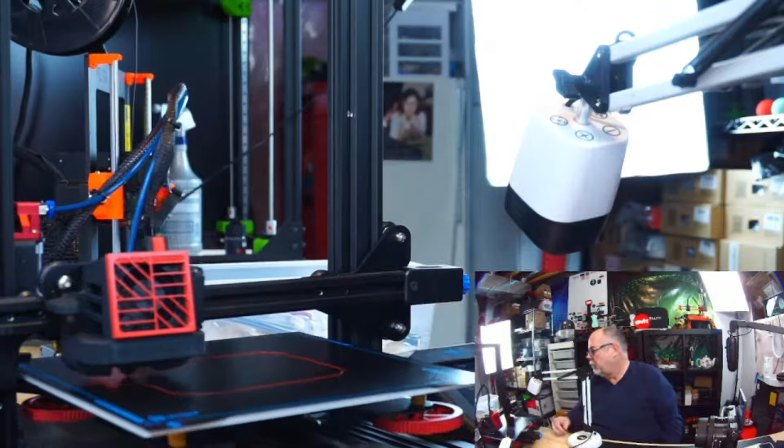Which is interesting because I didn't move the hot end at all. The hot end is in the exact same position. So now we're going to have better cooling because we're going to have cooling on both sides.

Yeah, that's a good first layer. Let's show you guys what's going on here. Close up. Yeah, the Jyers UI is great, it's an incredible user interface. So here we go.

Ooh, that red shows up nice on the black build plate. Come on, come on. I don't know what happened in this little corner right here, but yeah, we're okay. I'm not being fussy.

Oh, look, hello from Russia. It's so nice to see you from Russia, but hey, you know what? You're blocked. Sorry.

You in Toronto a couple of weeks ago got the most snow in one. I know, you guys got hammered. Sorry. Yeah, yeah, this first, look at this. I mean, other than that little glitch over there, right, is what you're saying, right there.

But yeah, this printer is tuned so well. I love these Ender 3 V2s. I love this build plate. Number one, this build plate is a BIQU build plate. It's really thin. But it's one of my favorite surfaces.

Everything sticks to it, and if I have any issues with things sticking to it, I throw on a layer of nanopolymer adhesive, and it does the job. But yeah, this is going to be nice first layer. Let's see how that's looking.

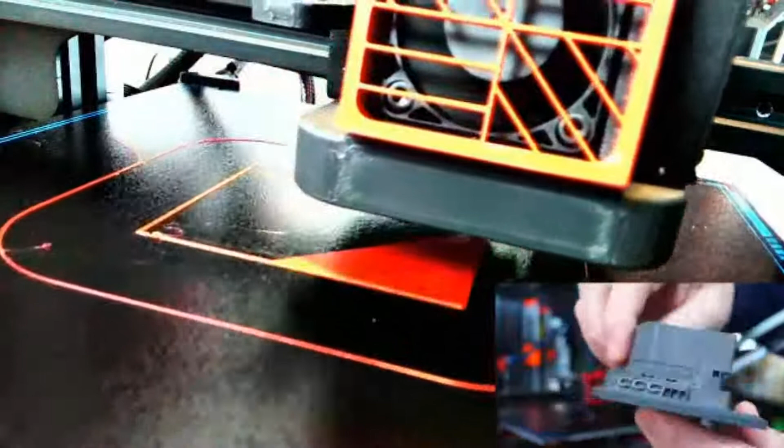I am printing just another one of these because it's a good little torture test. You can see that in the smaller camera. I'm just printing another one of these. You probably remember these, I printed the massive ones, right? The huge one on the rat rig. Turned out great, it was like, we're speaking massive.

You can check out my Twitter, I posted pictures of it. And I also posted pictures of the actual building on Twitter too, so you can see. So I'm printing another one of these little buildings here, just as I guess a torture test print, just because.

And this is pretty much all the modifications I'm going to do to this printer, other than, as I say, when I get the, not the bulb style thermistor, but the other one that inserts. When I get that inserting style thermistor, I'm going to probably put the Phaetus Dragon hot end on this because I have an extra one and I just want to use it. So.

Yeah, I had issues with the Z-axis structure on your Ender 5 Plus, but you gutted it this weekend and put in linear rails on the Z. So much better, yeah. Oh, thanks so much for Balchem, I appreciate that, much appreciated.

My channel's not perfect by any stretch of the imagination, but people that watch my intro video realize that I'm learning as I go as well. I make mistakes on live streams, that's why they're live streams. I don't practice putting these things together in advance. I just wing it. As we saw tonight, I had to drill a hole and put an insert in for this thing to work.

So you're Canadian as well. Awesome. I'm out here in Alberta, in Calgary.

Now that first layer is looking really, really nice. I don't know, is it just me? Is it a fetish? I love feeling first layers. It's just like, it's soft like a kitty.

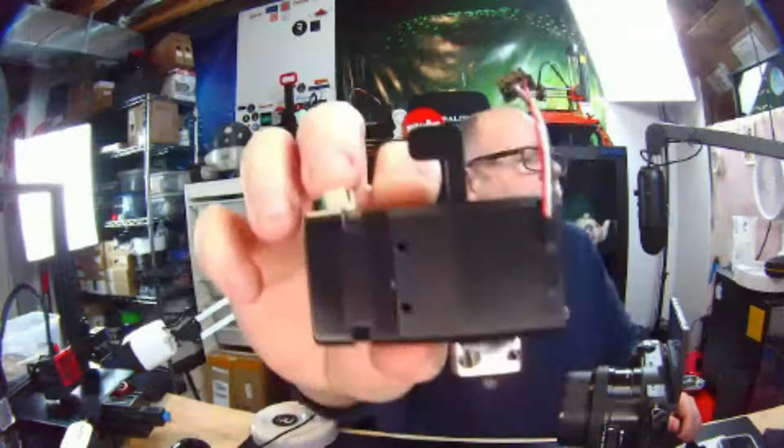So one of my future streams is going to be, oh this is nice. You want to see a nice looking hot end? This is going to be the rat rig one day, just as a trial. I might keep it on depending on how it works. Is this Big Tree Tech owned by BQ, like BIQU? Either that or they work together. But this is a H2O hot end, 500 degree hot end, water cooled.

In the top there you have an inlet and an outlet for water. I have the pump over on the shelf. That's a 500 degree direct drive hot end. Nice tiny stepper motor, 7-to-1 gear ratio I think, so it's got lots of pushing power.

So you have your hot end, your heater cartridge, and then the other one's your thermistor. I know the one's called the bulb thermistor on the cheaper Ender ones, but this is called... an insert thermistor? I don't know, anyways.

I don't know if it cools the stepper, because the water goes in one of the top holes and out one of the top holes. The other one's for the filament feed. So I don't know if it gets around to the stepper or not, I haven't taken this apart.

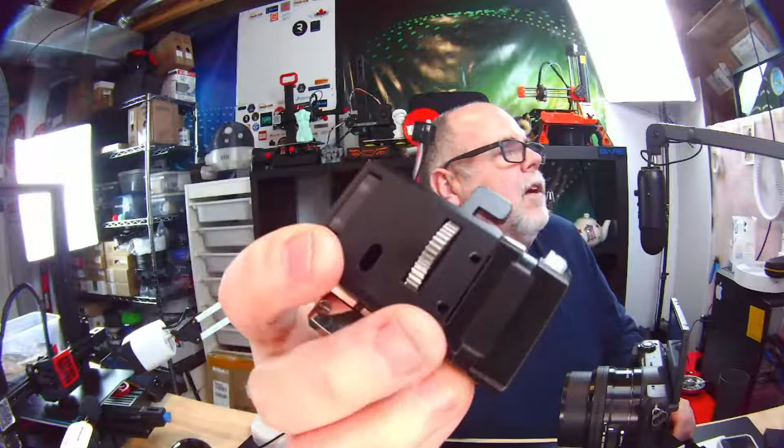And that's Jason, you beat me to it, I'm going to need to build... there's no holes. Those two holes you're seeing above my middle finger here, they're not mounting holes. So there's no mounting holes on this. I have to build a custom mount to mount this onto the rat rig somehow, and I'll figure it out, I got to design it up.

Begone Zofa, doesn't cool the stepper, no need. The hot end combo I think was 169, it was not as much as I thought. I'll have to put a link down, but I think it was like 169 or something. Troll alert, who's the troll? I didn't see a troll. Anyways, that's a future build coming up.

Comes in a nice box here, and I don't know, tech support might know this, but with this hot end came a Big Tree Tech box, and this is the box that came with the hot end. There's lettering right there - oh that light is too bright - but it's a Max 3186 V2.0.1. And it looks like, I don't know what it's for, I got to read, but anyways looks like a stepper driver. I mean, you'd say, but on the top it looks nothing like a stepper driver.

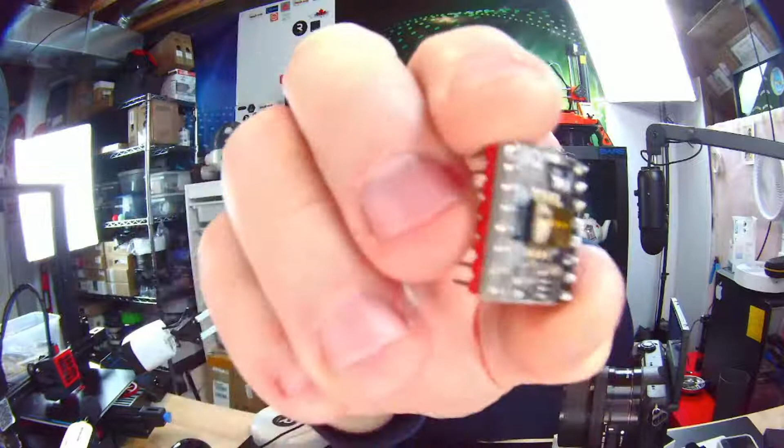So I'm not quite sure what I'm supposed to do with that, but I'm going to figure it out. I know I have the Big Tree Tech board on my rat rig, so maybe that's the stepper for the extruder motor, maybe I replace the one that's there now with this. Is that a Wi-Fi module on that? Huh, but anyways, 4 or 5 of them trickled in now and then. Oh okay, oh my mods will catch them. Stepper for the extruder, okay, so I replace the stepper that's on the board now with this one.

Interesting, okay it came with that, and it also came with all the hookups to go on the board as well. So good thing I have a Big Tree Tech board. And then obviously I'm going to have to tell Klipper what I've put in there, so it's going to be interesting. It's not going to happen for a while, I'll admit that, because I got a lot of things on the go prior to doing this. But it's going to be an interesting little experiment when I do get to do it. Anyways, that's that.

That's one of the things coming up. I have a 7-inch touchscreen for the rat rig to go on there eventually. And as I said before, I've got a whole slew of stuff on the shelf here that I've got to show. I've got this little Creality product up here I'm going to show in a week or two when I'm allowed to.

And I've got upgrades, I've got the upgrade kits for my Prusa's that I'm going to be doing. And I'm going to put together a video on this, this was a favorite one for John. This is that Creality pad thing, which works great for me on all my printers that I've tried it on, but Tripod couldn't get it to work. A little bit of controversy there, but we will get that to work.

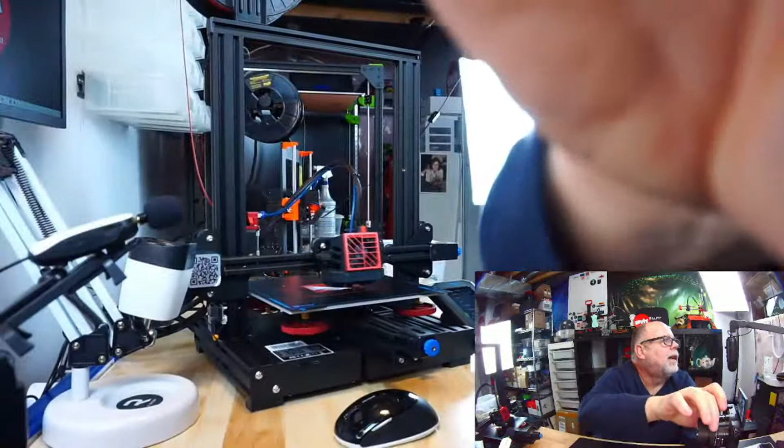The biggie, of course, I'm waiting for my table for my rat rig, which you can see if I zoom this right out - oops, wrong camera, I zoom this right out. You can see way over in the back there is my massive rat rig, 500 by 500. I'm waiting for the table.

And as soon as I get that, then I'm going to schedule my CR30, the belt printer. It's sitting in a box, literally sitting in a box down behind my benches here, unboxed yet. So that's something I've got to build yet too.

Richard wants to come over and do that with me, if we can schedule it'd be great. I know that he's real busy. He'll give me $10 for the pallet, take it or leave it. Okay, bids are starting at 10.

Chris, yeah, there is a lot of filament wastage, those purge towers, yeah. 4 colors, meh - I can only imagine what you'd print with an 8 color one.

So yeah, otherwise I've got that new laser to build. I want to do the enclosure. This guy up here, I've got the CR30. I know Chris has done one of these.

Chris did one of these on his channel. I've got this guy to unbox yet. I'm going to have fun with that because it was so inexpensive. And I want to maybe get this one set up and try to get Ethan interested in 3D printing with this printer.

That's been sitting here a while. And I've got to do some more videos on the Atom Stack Cambrian. I've got lots of rolls of that rubber filament. There's a lot of things I want to print with that other than the Vegemite dispenser, which is right there, that blue Vegemite dispenser.

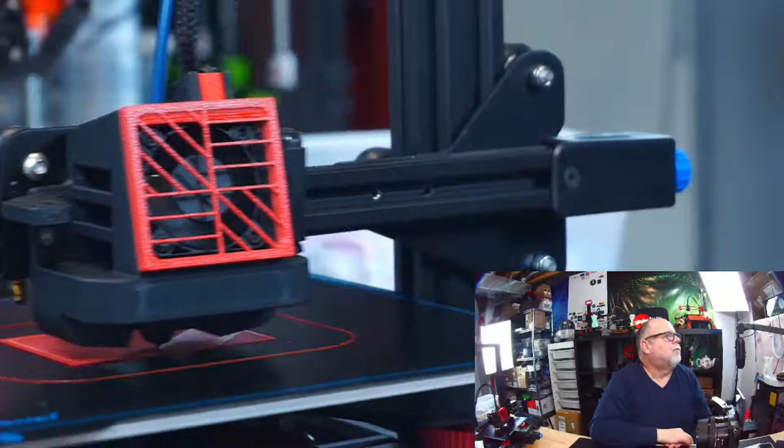You guys are awesome. So this print is going well now. Let's zoom in here real quick. This is starting to print, it's looking good, first layer's awesome on this. How close can I get with this camera? Oops, this is my Sony camera. Are you going to focus for me? There you go. Yeah, it's looking pretty good, not bad.